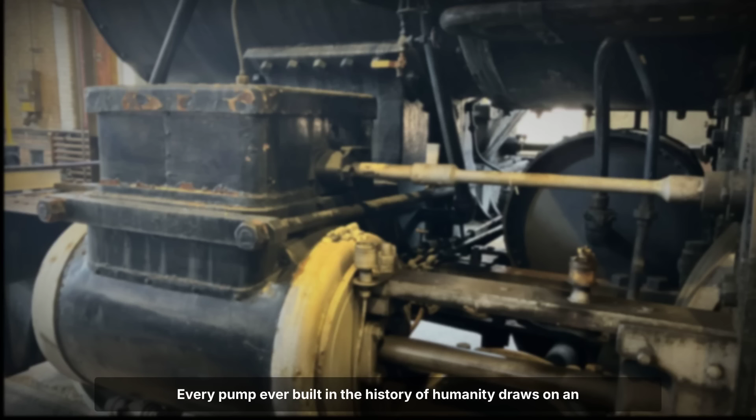Water does not run uphill. Every child learns this. Every engineer confirms it. Every pump ever built in the history of humanity draws on an outside source of power, a motor, a windmill, a hand, to move water against gravity.

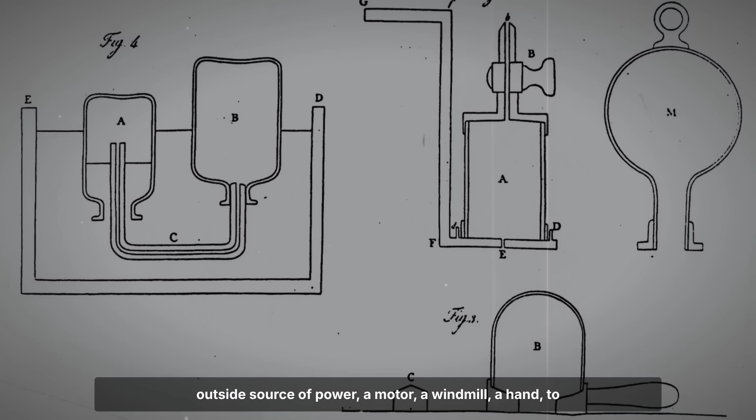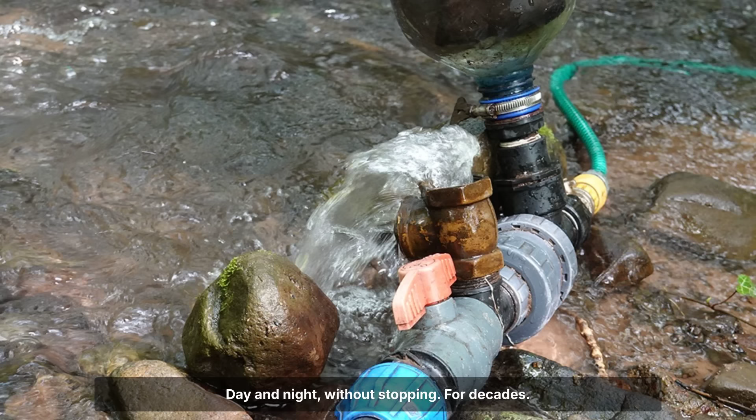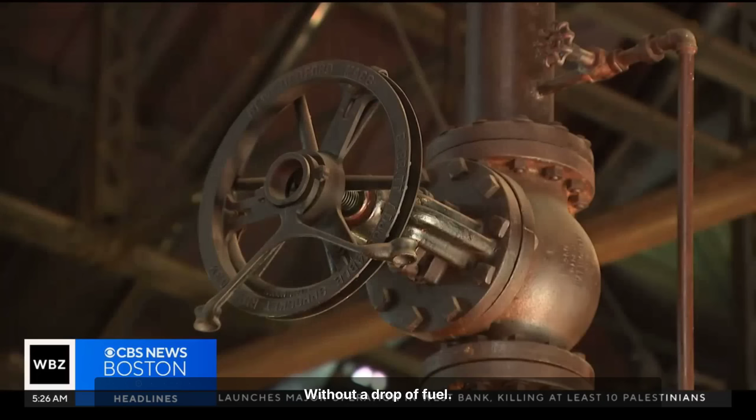Except one. There is a device that takes water from a stream and pushes it uphill to a tank, a trough, or a house. Day and night, without stopping. For decades. Without a single electrical connection, without a drop of fuel, without anyone watching. It has exactly 2 moving parts. Both are cheap valves. The entire mechanism fits in your hands.

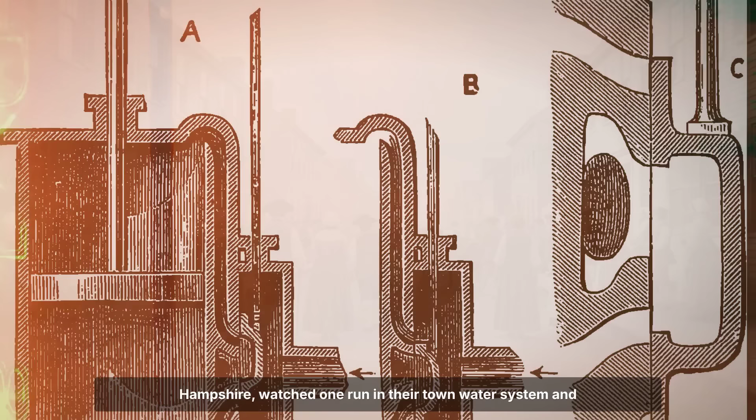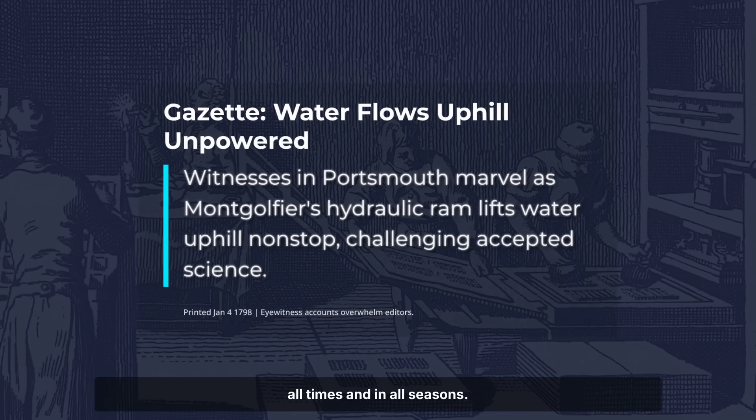In 1798, the people of Portsmouth, New Hampshire, watched one run in their town water system and gave it a name that perfectly captured what they were witnessing. They called it the Perpetual Pump. Newspapers reported that it worked by day and by night, at all times and in all seasons. A barrel of water every minute, endlessly, powered by nothing but gravity and a column of flowing water.

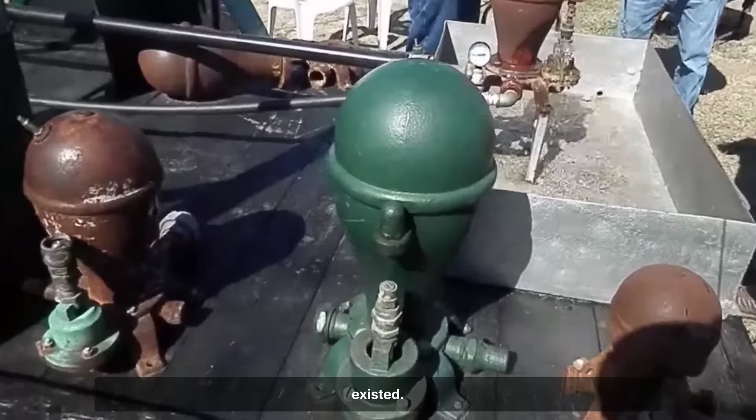And then, within a century, the modern world forgot it existed. To understand the pump, you must first understand the man who invented it. Joseph-Michel Montgolfier was born in 1740, the 12th child of a French papermaker. His family described him as a restless dreamer, a man who stared at fires while everyone else went to bed.

One evening in 1782, he sat watching smoke curl toward the ceiling and asked himself a question that would change the world. What if a bag could be made large enough to catch that rising force and carry a man into the sky? He built it. On June 4th, 1783, Joseph and his brother Etienne launched the first hot air balloon ever to fly. The crowd went silent, then erupted. The balloon rose to 3,000 feet and traveled over a mile.

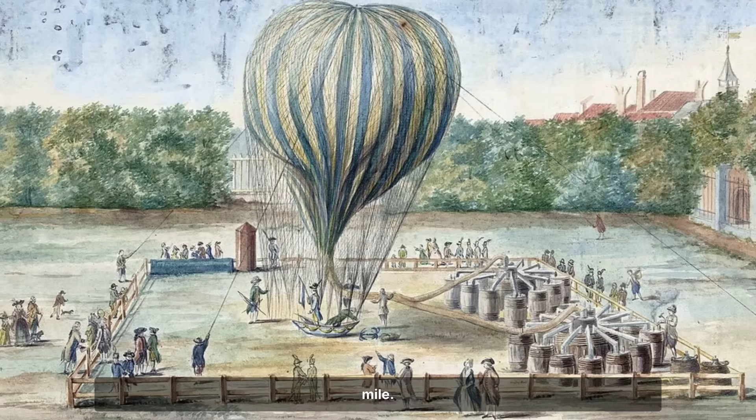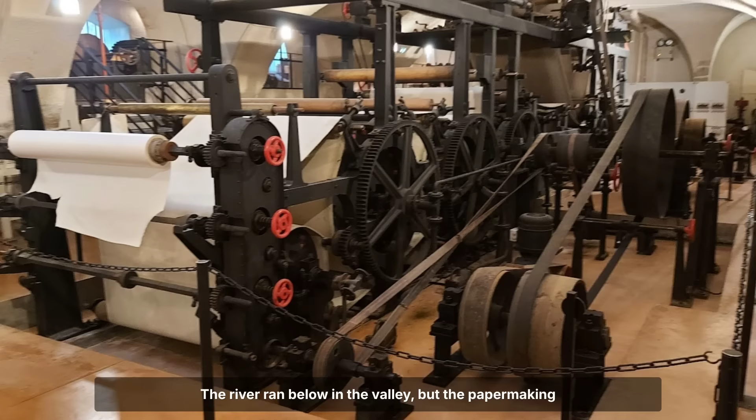Europe was transfixed. But Joseph quietly went back to his paper mill. He had a much more practical problem to solve. The mill needed water. The river ran below in the valley, but the papermaking happened up above. He stared at the water the way he had stared at the fire. He noticed something most people walked past every day.

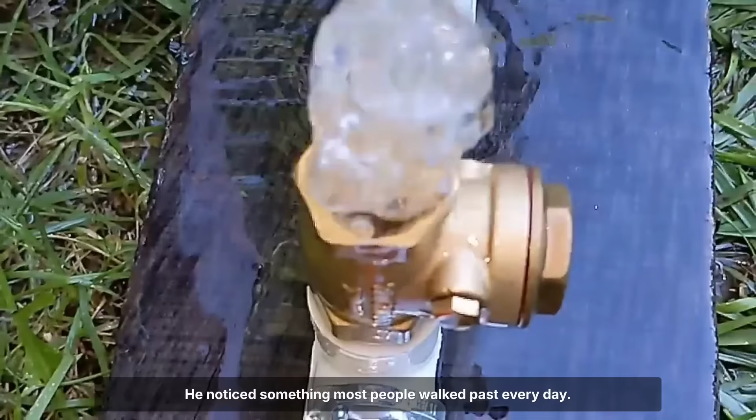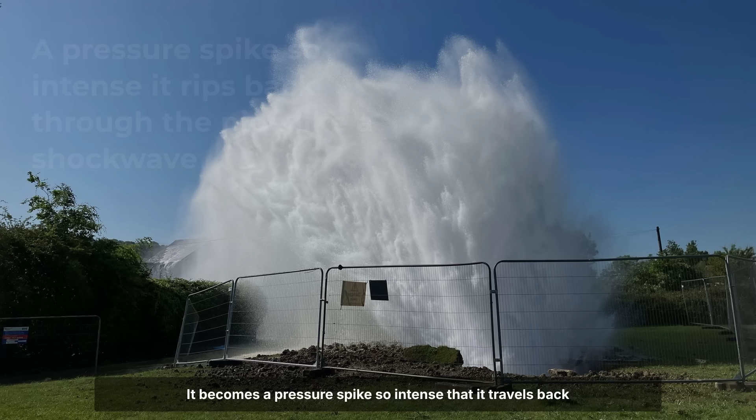When flowing water is suddenly stopped by a shut valve or a clenched pipe, the momentum of that moving mass does not simply disappear, it converts. It becomes a pressure spike so intense that it travels back through the pipe like a shock wave. Plumbers called it water hammer. They considered it a nuisance to be solved. Joseph Montgolfier called it an engine.

In 1796, he built the world's first self-acting hydraulic ram, a device that weaponized the shockwave of a water hammer to push a portion of that water higher than it had any right to go, powered entirely by the weight of the water falling below it. No electricity, no wind, no hands. The same mind that sent men into the sky had found a way to make water climb.

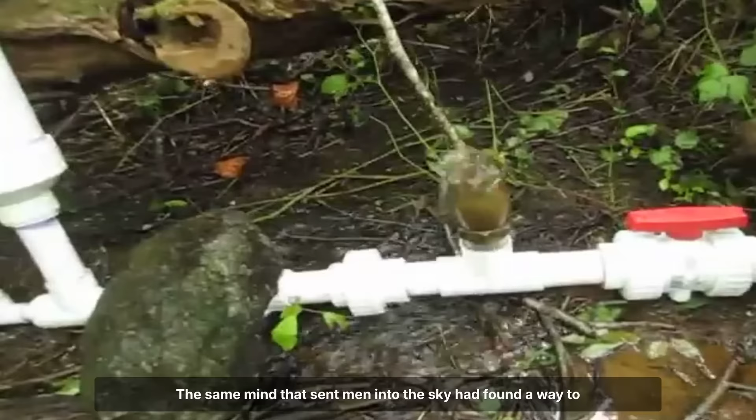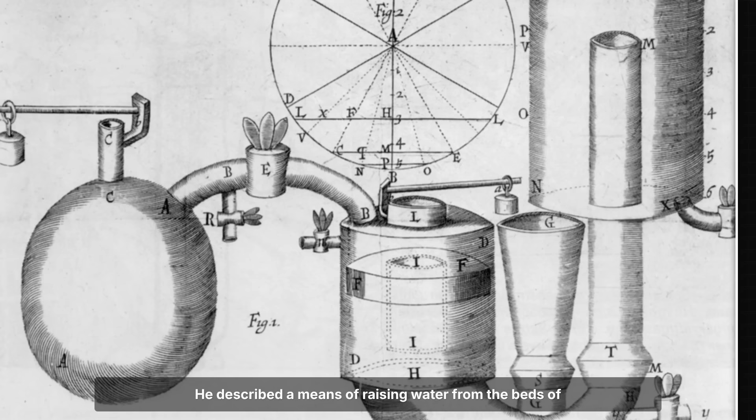Word traveled fast. Robert Fulton, the man who would later build the first practical steamboat, wrote a letter in February of 1798. He had seen the device running in Paris. He described a means of raising water from the beds of rivers by the simple movement of the stream without either pump or wheel. 40 feet high, 2 tubes, extremely simple.

Matthew Boulton, the man who partnered with James Watt to build the steam engine, took out a British patent on Montgolfier's behalf. The greatest industrial engineer of the age was protecting the invention of a papermaker who built balloons. Thomas Jefferson read about it and wanted one at Monticello. He wrote about it in 1805, noting that the president of a new nation recognized the power of a pump that needed nothing from anyone.

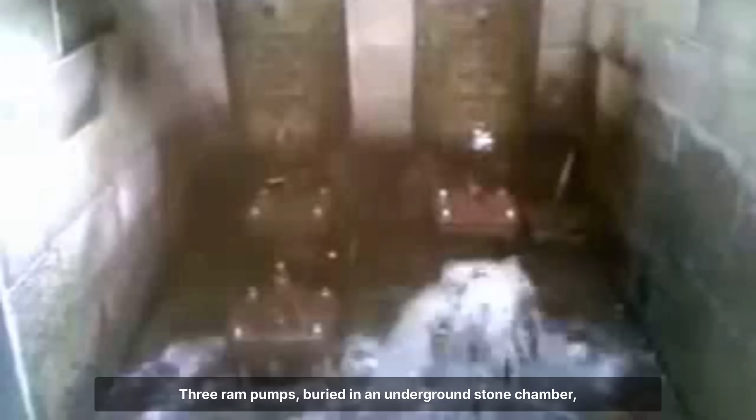By the late 1800s, hydraulic rams were everywhere. An engineering firm run by Josiah Easton supplied them to country houses, farms, and entire village water systems across the British Empire. One such installation went into a grand estate in Cornwall called Heligan in 1880. 3 ram pumps, buried in an underground stone chamber, pushed water continuously uphill to a 40,000-gallon reservoir. They ran for over 80 years without stopping. Click, clack. Day and night.

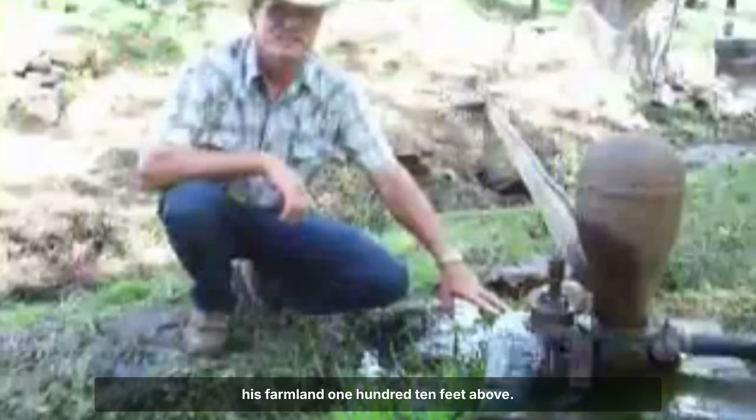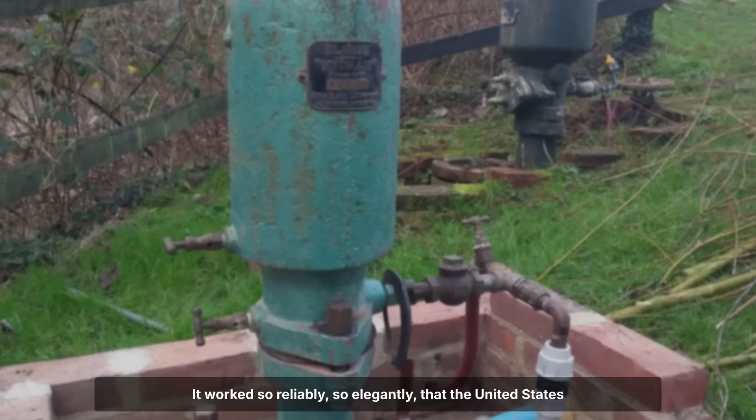Season after season. In America, a settler named William Priestley stood on the edge of the Snake River Canyon in Idaho, needing water for his farmland 110 feet above. He built a hydraulic ram from boilerplate and pipe fittings, pushing water straight up to his crops using nothing but the pressure of falling springs. It worked so reliably, so elegantly, that the United States government eventually declared it a National Historic Landmark. It still stands. And then, electricity arrived.

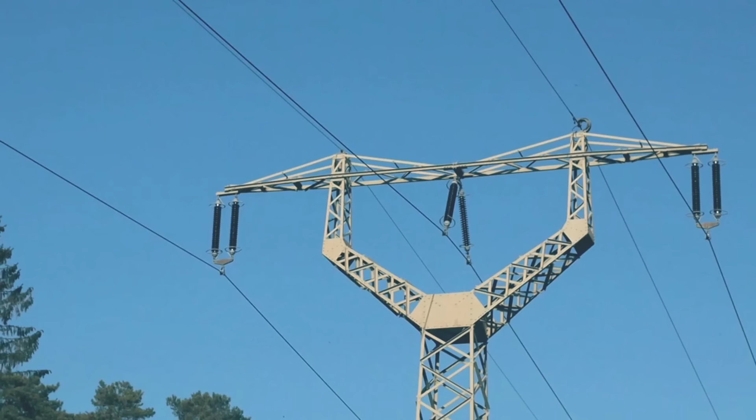The erasure of the ram pump did not happen with sabotage or a corporate ban. It was quieter, and in some ways more complete. The electric pump was faster and easier to install. You plugged it in and it worked anywhere. Rural electrification spread across America, and a whole generation of mechanical wisdom was simply set aside.

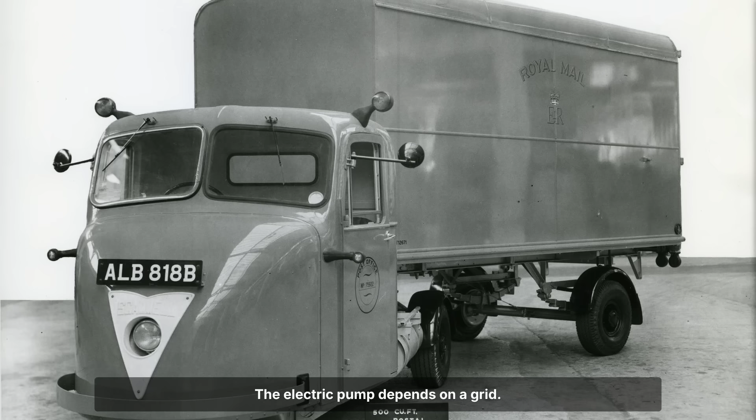Not burned, just forgotten. But that simplicity was an illusion. The electric pump depends on a grid. The grid depends on utility companies, monthly bills, supply chains, and a system that can, and does, fail. The hydraulic ram depends on gravity.

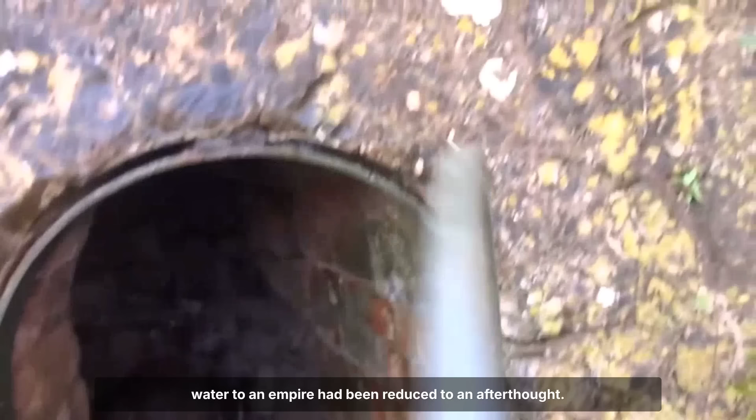Gravity has never had a billing department. By the 1960s, a technology that had supplied water to an empire had been reduced to an afterthought. The Easton Company, which once sold thousands of pumps a year to estates and villages across England, had shrunk to annual sales of just £1,500.

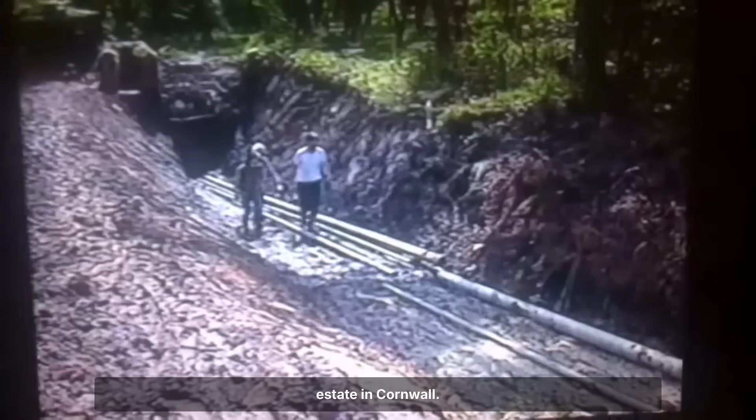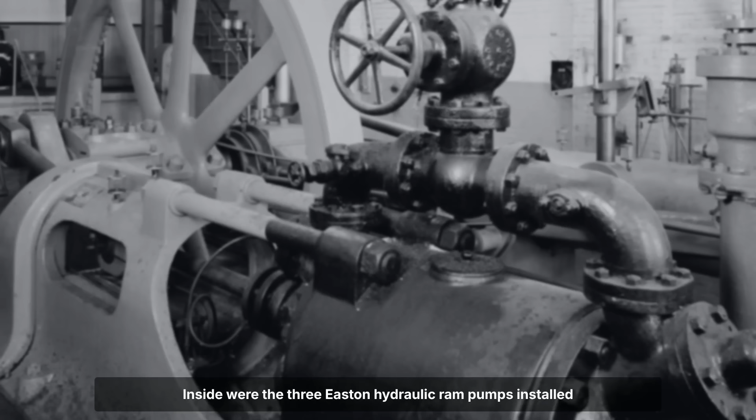Then, in 1990, a record producer named Tim Smit was clearing the overgrown, abandoned gardens of the Heligan estate in Cornwall. 18 feet underground, his crew found a stone doorway sealed with a century of mud. When they cleared it, they discovered the ram chamber. Inside were the 3 Easton hydraulic ram pumps installed in 1880, perfectly intact. The valves still seated, the chambers still sealed.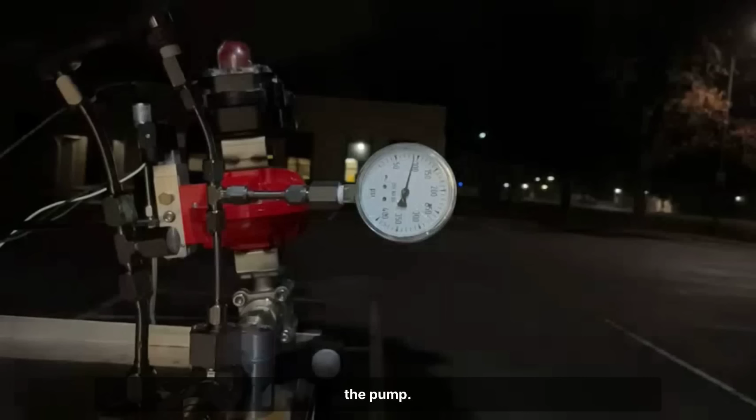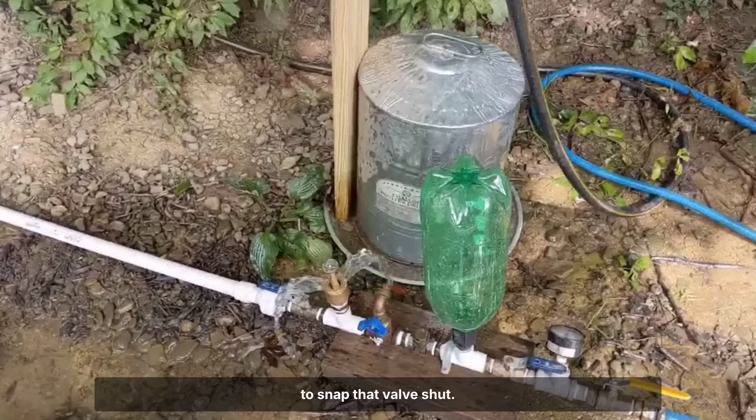The mechanism is almost insultingly simple. Flowing water enters a drive pipe and runs downhill toward the pump. It picks up speed, rushing faster and faster, until it escapes through a weighted valve at the bottom called the waste valve. As the water accelerates out, the drag becomes great enough to snap that valve shut. That sudden shutdown of moving water creates a massive pressure spike, the water hammer. That shockwave forces open a second valve, driving a portion of the water up a delivery pipe much higher than the source it came from.

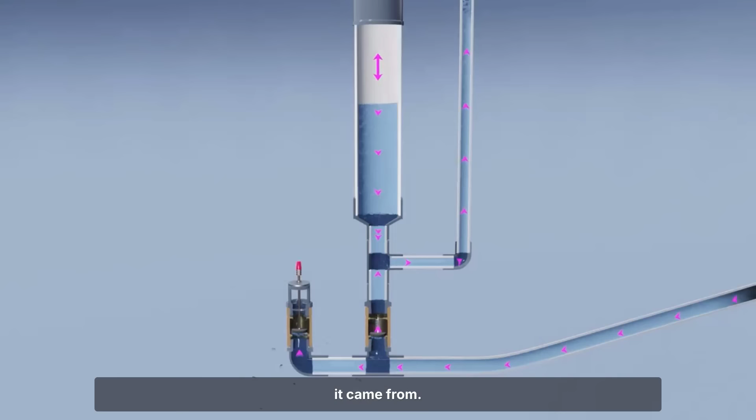The shockwave passes, the second valve closes, the waste valve falls open again, and the cycle restarts. Click, clack, between 20 and 100 times a minute, every day, every year. To install one, you need 3 things: a water source that flows at least 2 to 3 gallons per minute continuously, a drop in elevation of at least 3 feet from the source to the pump, and a destination where you want the water delivered.

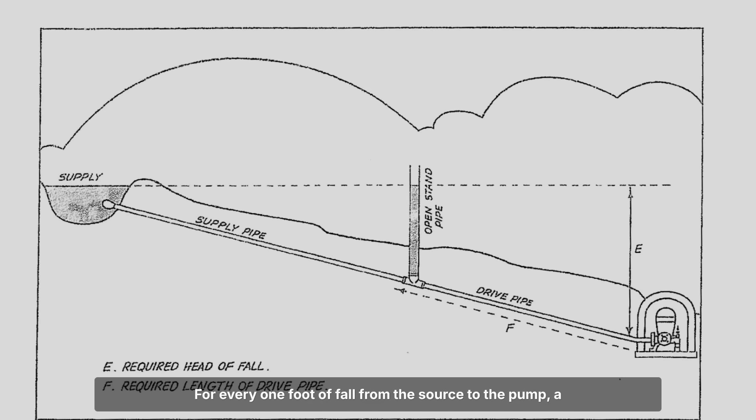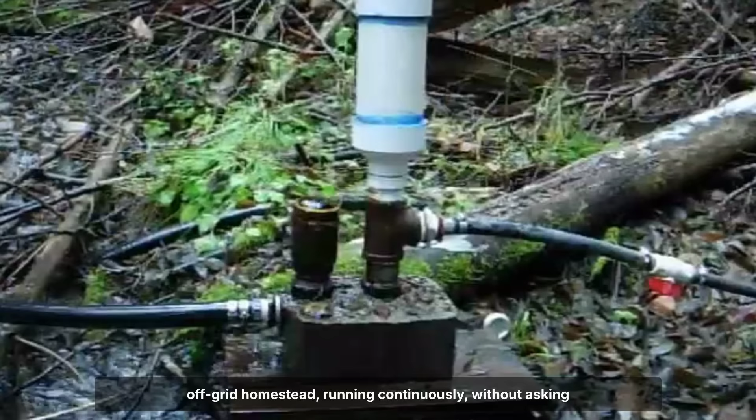The efficiency is staggering. For every 1 foot of fall from the source to the pump, a properly installed ram can lift water roughly 7 to 10 feet. With an 8-foot fall, you can push water 80 feet uphill. A modest stream with a 6-foot drop can deliver nearly 3,000 gallons of water per day to a tank on a hillside above your house. That is enough drinking water and irrigation for an entire off-grid homestead, running continuously without asking anything of anyone.

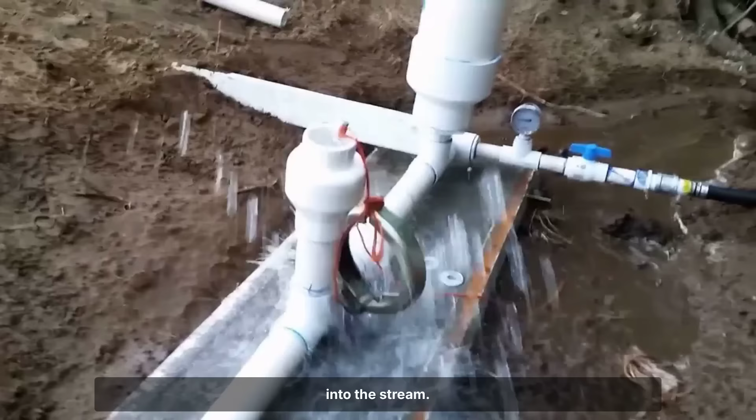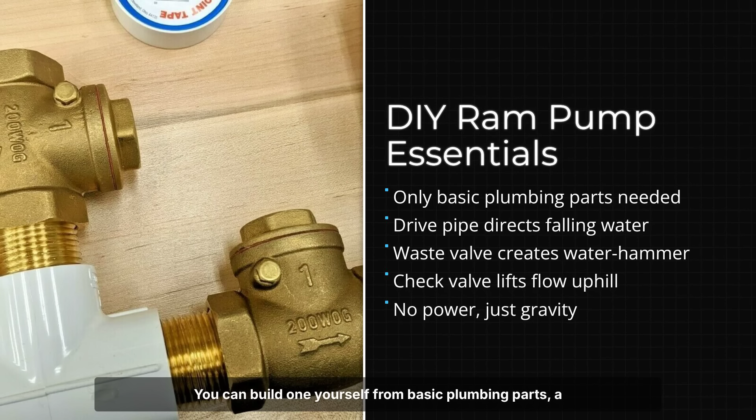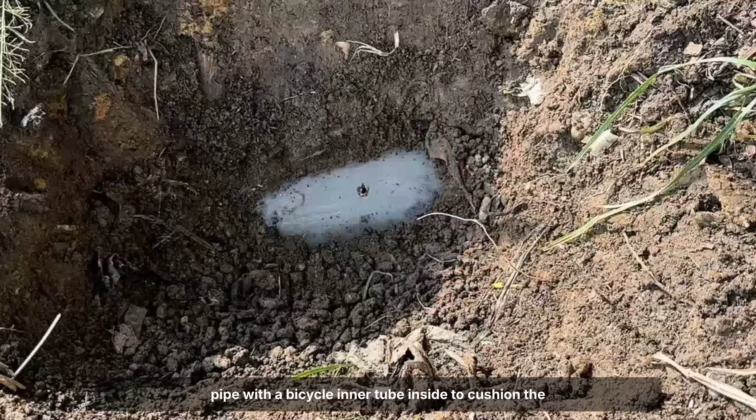The trade-off is volume. The pump delivers between 10 and 30% of the water that drives it, while the rest spills harmlessly back into the stream. But that smaller volume pumps continuously, around the clock, every day of the year. You can build one yourself from basic plumbing parts: a rigid drive pipe, a brass waste valve, a delivery check valve, and a pressure vessel made from a capped piece of PVC pipe, with a bicycle inner tube inside to cushion the shockwave. Clemson University and North Carolina State agricultural engineers have documented the full build. Total parts cost under $200. No permits required in most jurisdictions, because you are simply managing surface water on your own land.

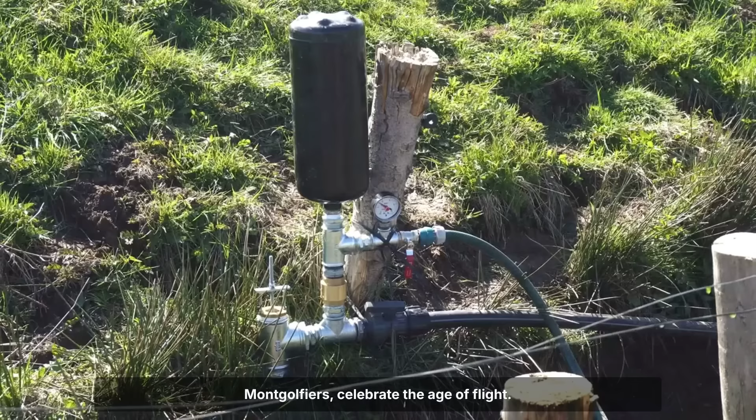This brings us to the question that matters most. The same man who launched the first balloon, who showed humanity it could defy gravity and leave the ground, also invented a device that uses gravity to move water uphill forever. He gave us two gifts in 13 years. One took humanity into the sky, the other kept it alive on the ground. We remember the balloon. We teach it in schools, name airports after the Montgolfiers, celebrate the age of flight. But the pump, which has moved more water and kept more communities alive than any balloon ever could, we quietly forgot. This is the pattern.

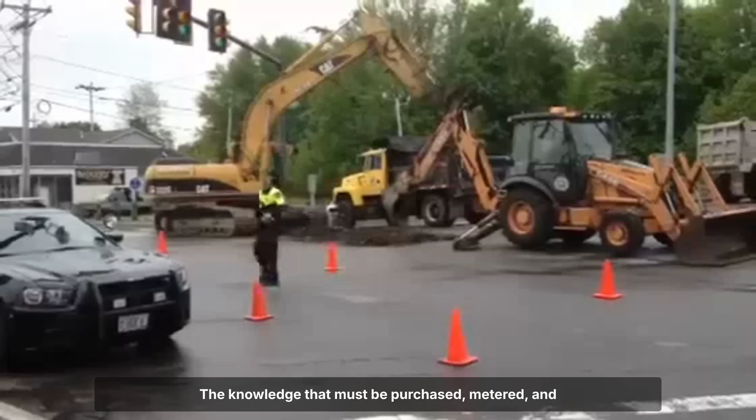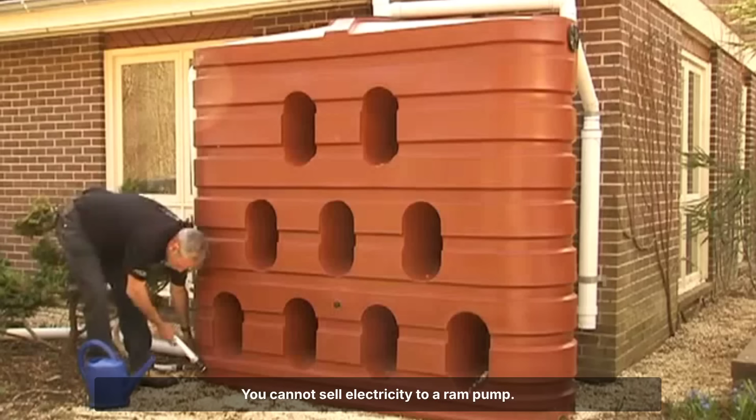The knowledge that must be purchased, metered, and maintained by a corporation gets preserved. The knowledge that requires nothing from anyone except gravity and ingenuity gets set aside. You cannot sell electricity to a ram pump. You cannot bill its owner monthly. So it faded from agricultural schools, from engineering curricula, from the catalogue of things worth knowing. Meanwhile, the grids that replaced it are failing. Communities that built their entire survival around electric pumps are discovering what happens when the power goes out and the backup generator runs out of diesel.

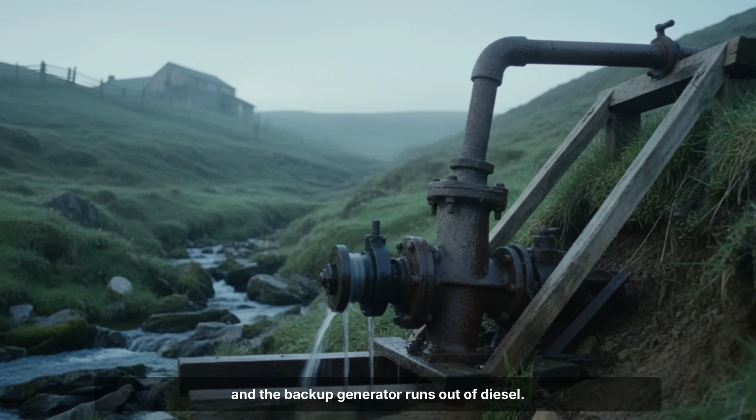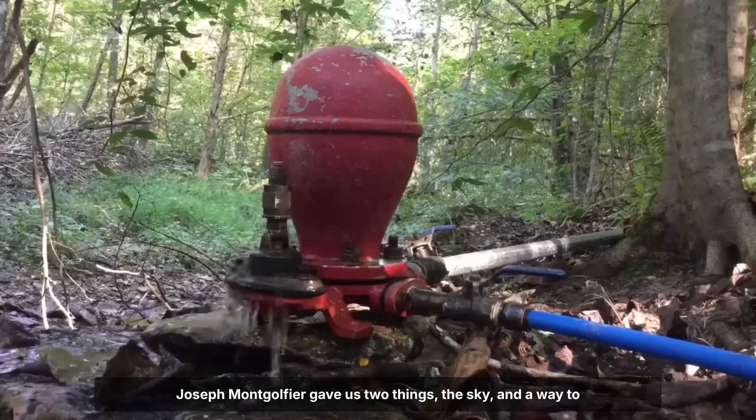But somewhere in a forgotten valley, a hydraulic ram pump is still thumping. Click, clack, day and night, at all times and in all seasons. Down in a stone chamber at Heligan, out on a hillside in Idaho, in the creeks and streams of anyone willing to look. Joseph Montgolfier gave us two things: the sky, and a way to survive without asking anything from anyone. We kept the sky. The pump waited. It is still waiting.